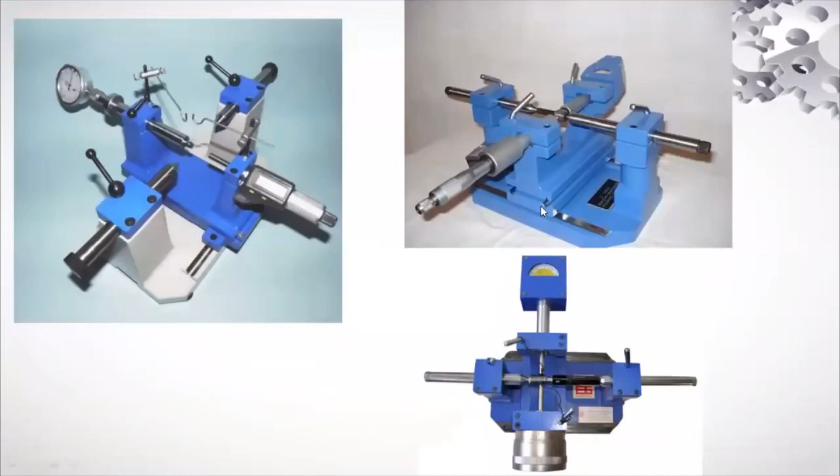See, these are the different varieties, or you can call them the types of floating carriage micrometer, right? Some colleges or some organizations will have this type, some will have this one, and some sophisticated organizations will have this type of fiducial indicator.

See here, instead of the drum, all of you can see, right? Instead of the drum micrometer head, which you can see here in this slide, they have used the digital micrometer here. Rather than taking the reading from a big drum, the digital indicator will show the reading. The same procedure, only a little bit of change.

And in this case, this white dial that you are seeing is the fiducial indicator. These two are the centers, and these are the measuring anvils. If you take the second image, this is a little bit different compared to the first one. But the procedure will remain the same to measure the effective diameter or major or minor diameter of the given screw thread.

See here, this is the micrometer, right? Instead of the big drum micrometer, this is used. Here the fiducial indicator, instead of the white dial, has only a single double line. I will show in the video how a floating carriage micrometer is actually used to get the measurement, right?

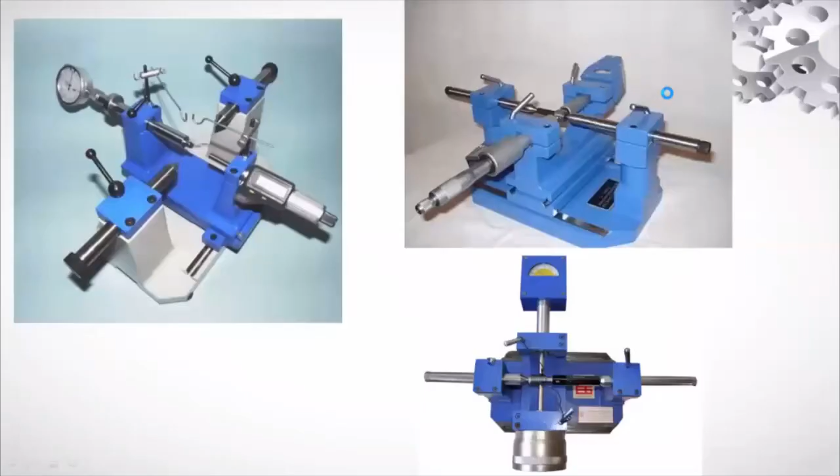Each individual person has their own perception to judge whether the component is fixed, whether it is a loose fit or a tight fit. That depends on human senses, right? Because of this, the application of pressure varies. If you rotate the thimble, this spindle will exert pressure onto the component, right?

While applying this pressure, the component may be subjected to deformation. That means more pressure may be applied at one point, and if another person uses it, he may apply a little less pressure. So how to judge that a correct or nominal pressure is applied on the component to get an accurate result? Even though the instrument gives the exact result, how do we judge whether the pressure applied onto the component is nominal? For that reason, in order to get accurate values, this bench micrometer is used.

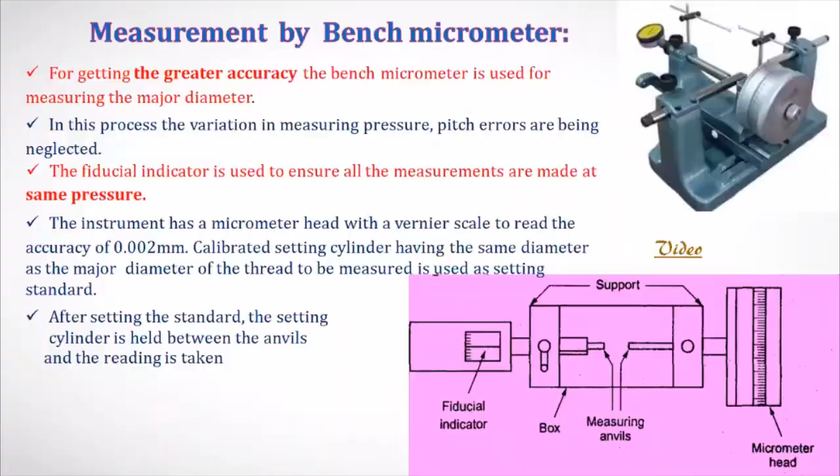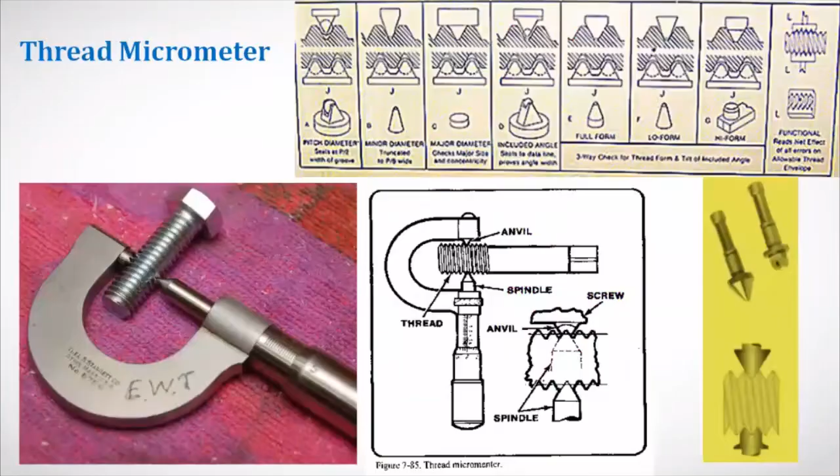Next we'll move on to the measurement of minor diameter. Similarly to what I explained in the previous one, I'll go back. You can observe here, right? Measurement of major diameter, external thread, internal thread. Similar to this, I'm explaining now. Measurement of minor diameter. I hope all of you can understand. Don't get confused.

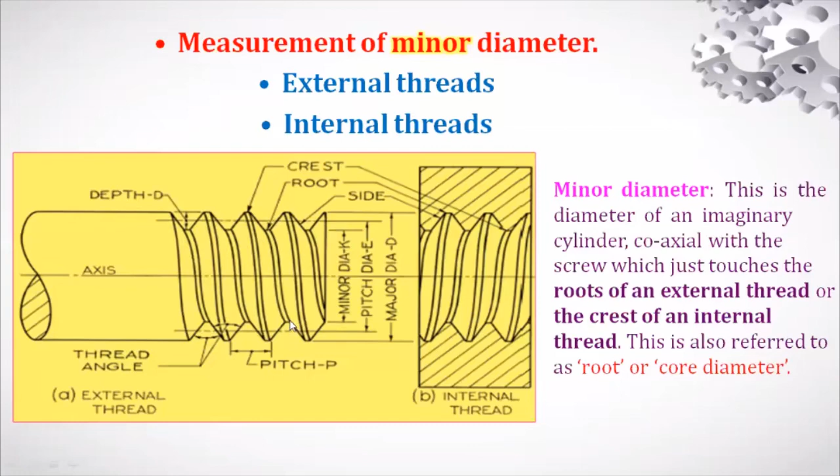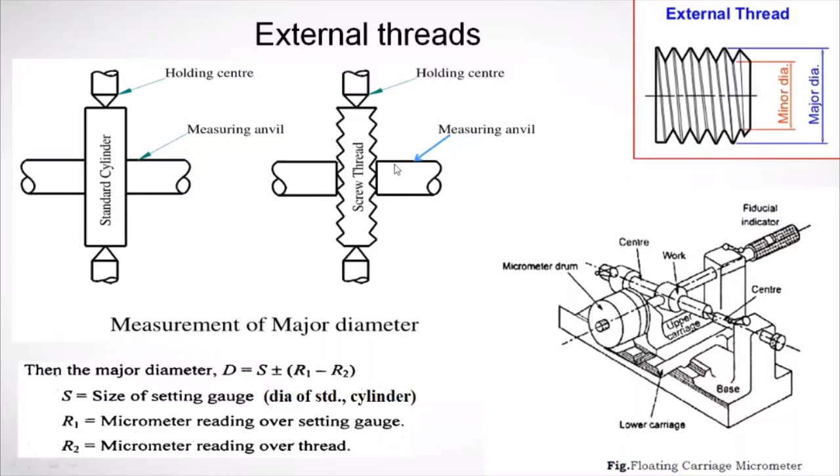See, in this case, from this point to this point, if you want to use the bench micrometer or the micrometer, is it possible that you can use only the flat heads like this? You can see that one. These are the flat anvils. Is it possible to measure with the flat anvils? It is not possible, no. Even if you use the flat anvils, it will not touch the root of the thread. Are you getting the point?

See, root means till this point. If you use only flat anvils, it touches only the crest. But this is minor diameter, external thread. You have to measure till the root. For that reason, this space has to be filled, right? In order to fill this space, they are going to use these type of V pieces. You can observe here the red color one. You assume this is the V shape metal pieces. They are going to use this.

These are called the centers or V pieces, right? Two V pieces will be used. There is no confusion, right? So the minor diameter is measured by a comparative method by using floating carriage micrometer, with V pieces which make contact with the root of the thread. To contact with the root of the thread, this is the root of the external thread, minor diameter, they have to have some piece over here. That piece is the V pieces, like this, they are going to use.

See, these are the measuring anvils. If you simply use these two measuring anvils, it will never come in contact with the root of the thread. In these places, you observe the cursor, these V pieces have to come in place, right? Are you getting my point? These two have to come in at these places. These V pieces are made in several sizes, having suitable radii at the edges. V pieces are made up of hardened steel material.

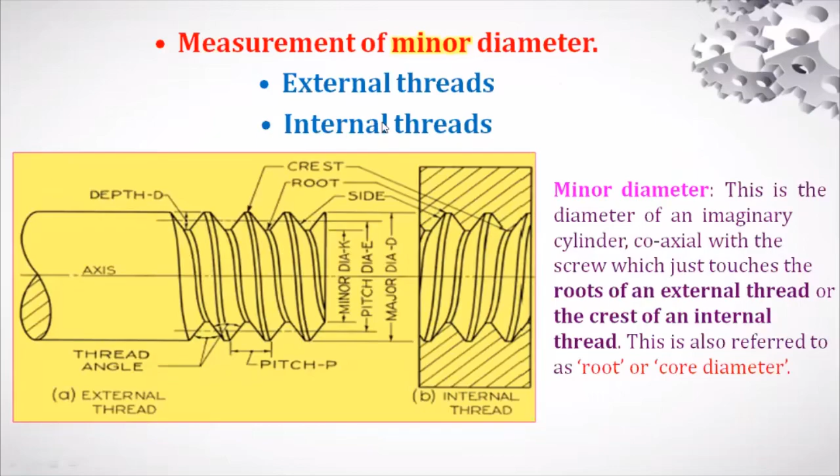So, minor diameter of internal threads. You can observe here, the minor diameter is this red color line of the internal thread. Internal thread means for a nut. There are two methods which can be used to measure the minor diameter of the internal threads: using taper parallels and using rollers.

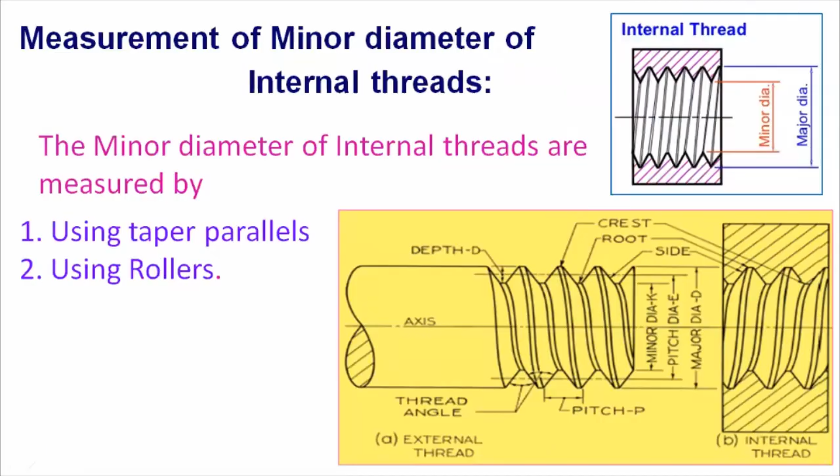So as the name implies, it is taper parallels, taper sided. You can decrease or increase the diameter by sliding the two parallels, and that size you can measure on the micrometer anvils. For diameters of the nut or internal thread less than 200 millimeters, this taper parallel method of measuring the minor diameter of internal thread will be used.

It is very common. The taper parallels are a pair of wedges. Wedge means one side is small, one side is big. Wedge shaped parallels, taper, right? The diameter across their outer edges can be changed by sliding them over each other. By sliding these two parallels, you are able to change the size, and thereby measure the minor diameter of the internal threads. You can see this image, minor diameter.

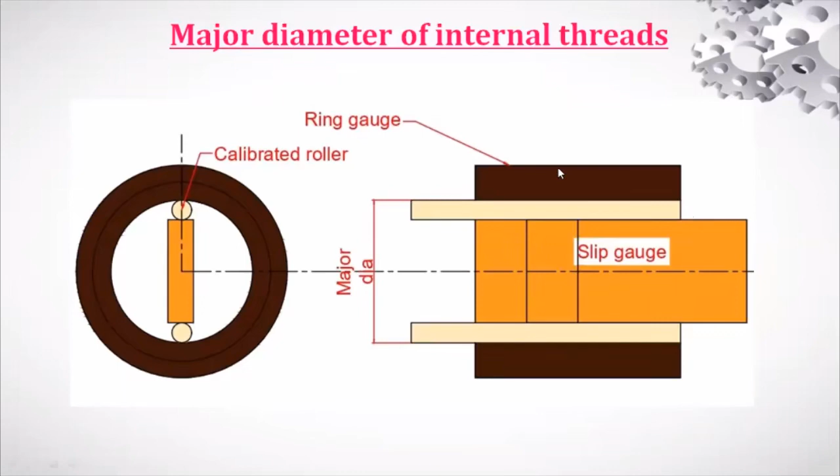So the length can be measured based on the length of the slip gauge plus 2 times the diameter of the roller. You're going to get the size of the major diameter of the internal threads. I hope all of you can understand, right?